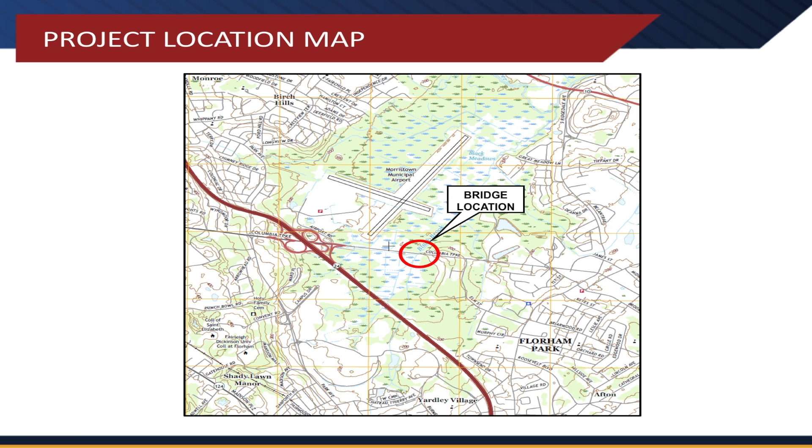So here's the location map. Again, there are some boards around you to see where the project is at. You can see it's just to the west of the interchange with Route 24. You can see the Morristown Municipal Airport there in the northwest corner.

Here is an aerial map which is zoomed in a little closer, and you can see some of the facilities or features in the area. There's the open road Cadillac dealer to the northwest. We have the Mack-Cali Business Park down there to the southeast. Eli's is right there to the northwest. And of course the bridge carries traffic over the Black Brook.

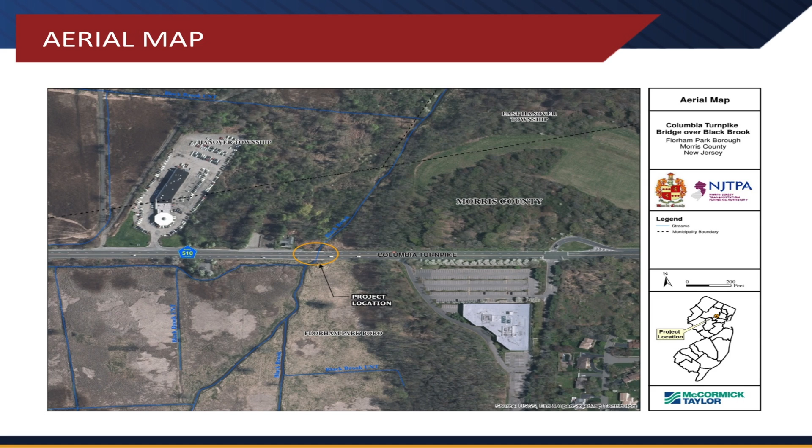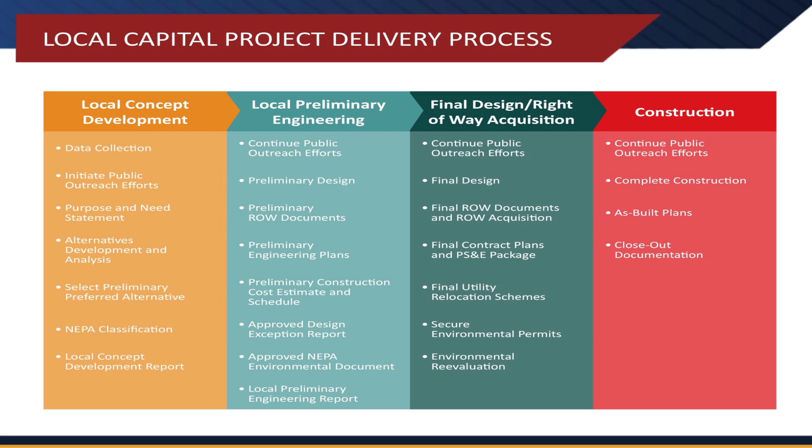So this is the local capital project delivery process. There are 4 phases here: the concept development phase, preliminary engineering phase, final design and right-of-way acquisition phase, and construction. We are in that first phase, local concept development. The first two times we were out to talk to you were to initiate the public outreach efforts, and then we came back out to discuss the alternatives we were developing. And now we're back out describing the preliminary preferred alternative. We're in this phase now, which is about an 18-month process. By the time we get to construction, these next two phases will probably be about 5 years, and then construction will probably be about 22 months, as Peter will talk about when he gets into the PPA.

Now, when we take a closer look at the local concept development process, again, this is what we're in now.

This is that first bar in the project delivery process. You can see that community outreach is a component of each of these phases or tasks along the way. So the first time we were out, we were talking about the existing conditions, we were developing the purpose and need, we were soliciting input from you, the locals here, as to what some of the other problems may be that we're unaware of. And we've done that, and we appreciate your input.

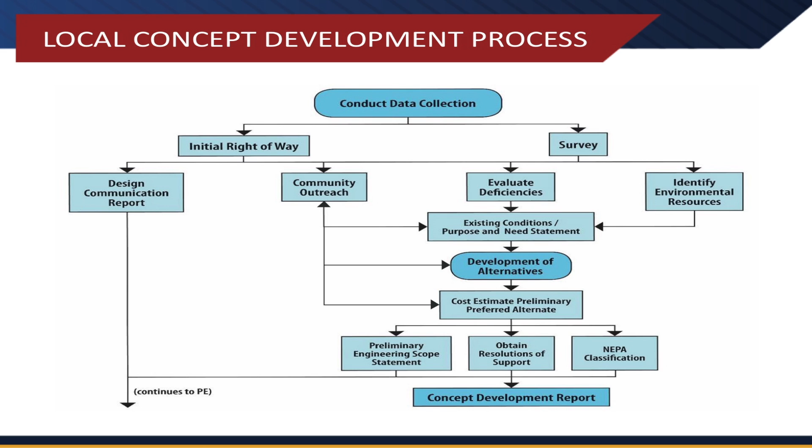Then we came out and we talked about the alternatives. We had developed several alternatives that we presented. We obtained input from the group. We took that input back, and then we refined it. And through additional coordination with the locals, the stakeholders, and the local officials, we've developed a preliminary preferred alternative, which we're here to talk about today.

So more about the bridge itself. Again, it was built in 1929. It was widened to the south in 1960. The bridge type is a single-span bridge. It has concrete encased steel beams and rolled steel multi-stringers. Its length is 35 feet. The width is 45 foot 7 inches.

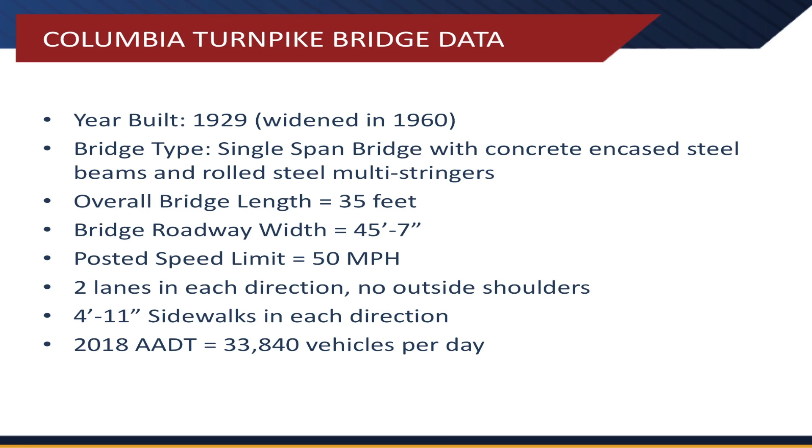The posted speed limit along Columbia Turnpike here is 50 miles an hour. It currently contains 2 lanes in each direction with no outside shoulders at the bridge. And there are sidewalks on the bridge which are 4 foot 11 inches in each direction. And the ADT is quite high here. This ADT was taken in 2018, and it's 33,840 vehicles per day. So lots of traffic there.

The condition of the bridge, overall it's in fair condition due to the condition of the superstructure. The superstructure is everything from the beams and up, and that's in fair condition with a rating of 5 out of 10. That's due to some section loss, which we'll show you some photos of. There's rusting at the beam ends, there's heavy rust, there's staining, spalls, laminations, the diaphragms with section losses and holes. And again, we have some pictures that we'll show you.

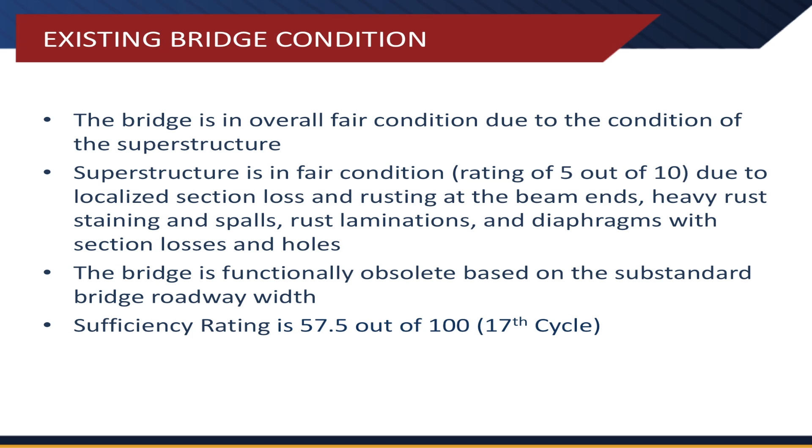There's also some photos on the opposite side of the room there. The bridge is considered to be functionally obsolete based on the substandard width, and that's specifically related to the shoulders, or lack thereof. And the sufficiency rating is a 57.5 out of 100 based on the 17th cycle. That's a bridge reevaluation report, which is conducted every 2 years.

So some of those photos that I was talking about. This one here shows the underdeck on the original section. This was the piece that was built in 1920. And you can see efflorescence, this is that white stuff there. That's where when the water infiltrates, it dries out and evaporates and leaves that alkali type material there.

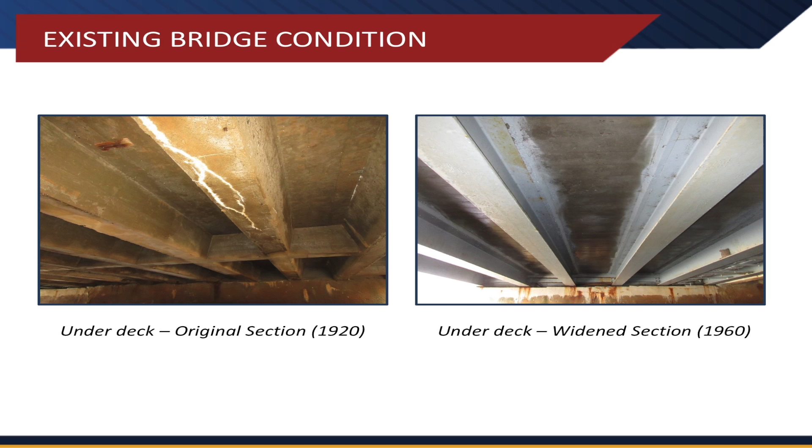This is the newer section, built in 1960. You can see this is an I-beam here. Again, you can see the corrosion down here, you can see the rust happening at the abutment there. Again, you see some rusting, some cracks in the abutment area here, efflorescence. So you can see that's in poor condition there. And here in this photo, you can see some spalling happening at the east abutment.

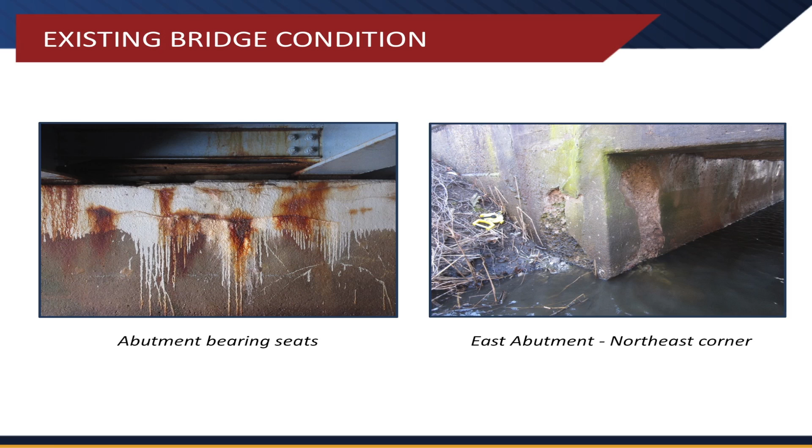So in addition to those issues on the bridge itself, there's also some environmental and site constraints that we need to take into consideration when we're looking at this bridge. We do have some features that are right in close proximity of the bridge, including Ely's, which I don't have my pointer for, but I think everybody in the room knows where Ely's is. It's right in this location here. All of this green in the area represents wetland areas, so that's a sensitive area that we try to avoid, minimize if not avoid at all lengths.

There is a property right here which is listed on the National Register of Historic Places. The structure's been removed, but the property itself, the land itself, is still considered historic. There's a pump station just opposite the Cadillac dealership, and then you have the Cadillac dealership itself, as well as an office building. So we do have quite a few things out here. I know the area seems rural, but right in the immediate vicinity of the bridge, there are some features that we need to consider when developing alternatives. We want to make sure we avoid, minimize impacts to all those things.

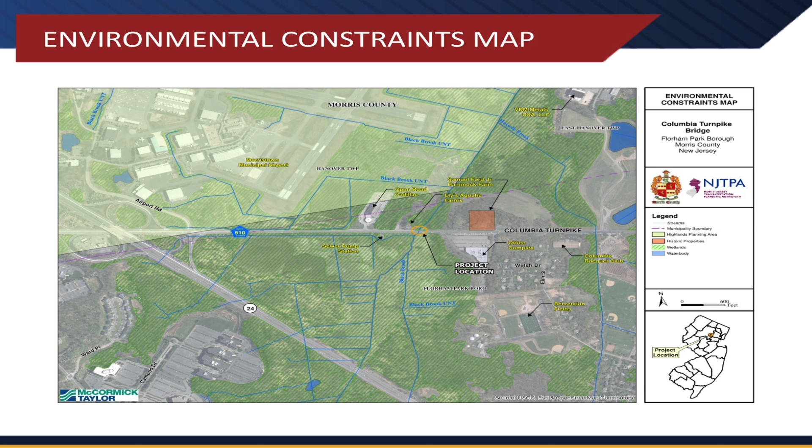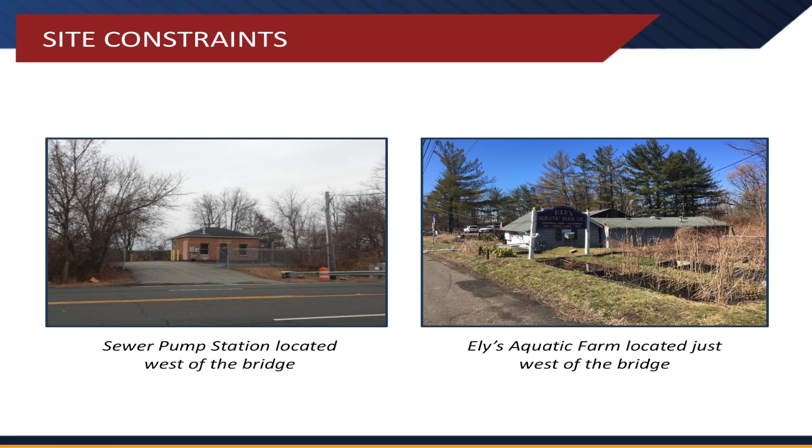And here are some of those features that I just described. Here's the sewer pump station, this is on the southwest side of the bridge. This is Ely's Aquatic Fish Farm, located right next to the bridge on the northwest side. This is the office complex, Matt Cali, on the northeast side of the bridge. And then the Morristown Municipal Airport, which is located on the northwest side.

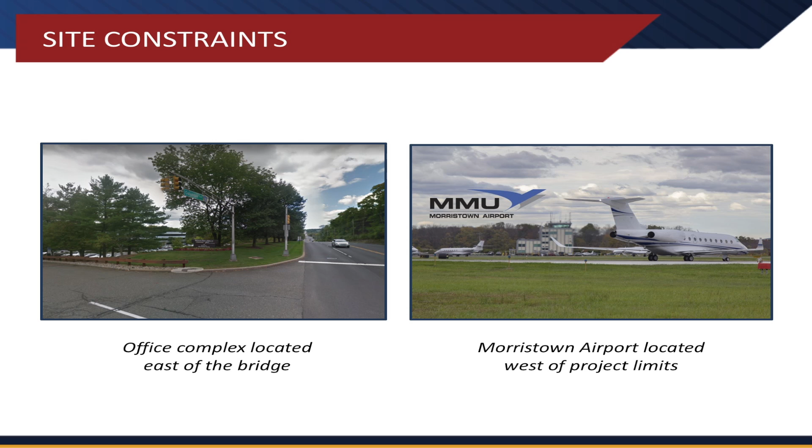In terms of the status of the project, in November 2017 is when we started the LCP study. In the spring, we completed the data collection and held our first local officials briefing, as well as the Public Information Center. Then in June, we developed the project purpose and need statement. In the summer, we developed the conceptual alternatives. In August, we came back for local officials briefing number 2, and in September we had our stakeholders meeting and Public Information Center number 2. Here we are on the 12th of December to talk about the preliminary preferred alternative through the local officials briefing and the Public Information Center.

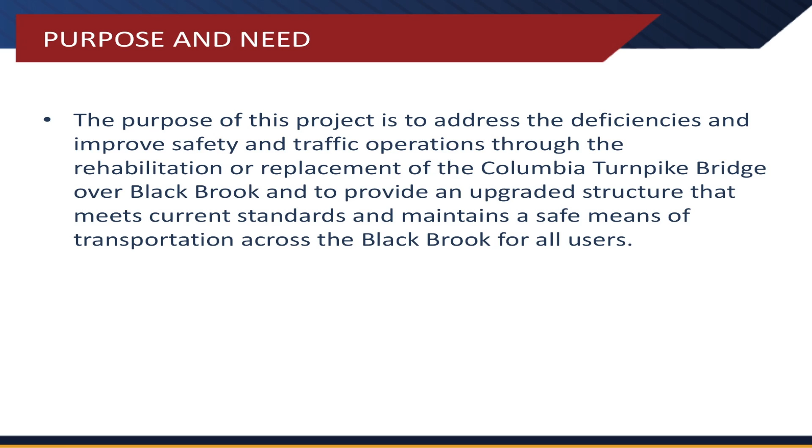So the purpose and need for this project is stated here. Again, this came from input from the various stakeholders and locals that we spoke to through these meetings, as well as our own research from reports and field and site evaluations.

The bridge is currently functionally obsolete due to the substandard roadway shoulder widths, and it's in overall fair condition due to the condition rating of the superstructure. The superstructure condition is fair with a rating of 5 out of 10, and the substructure is in satisfactory condition. The bridge currently has a sufficiency rating of 57.5.

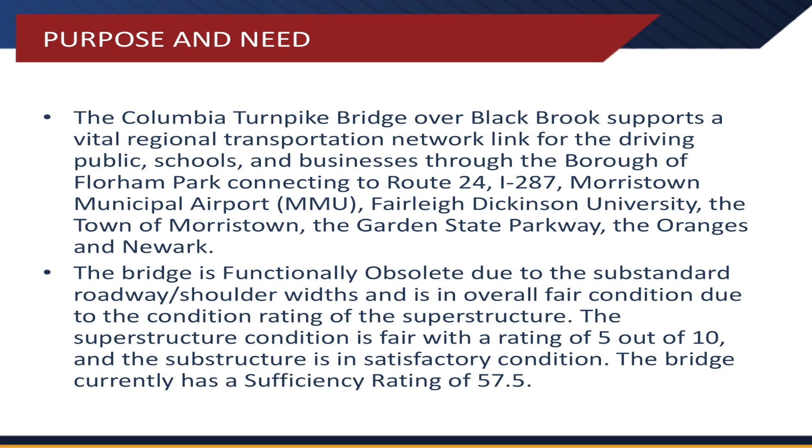So that's the need. Now we also have some goals and objectives that we'd like these alternatives, and specifically the PPA, preliminary preferred alternative, to meet as many of as possible. We'd address bridge structural deficiencies. We'd like to upgrade the bridge and approach roadway conditions to meet AASHTO and NJDOT safety standards, including new parapets and guide rail. We'd like to minimize the environmental, social, and economic impacts in the project area.

We want to minimize the impacts to the Black Brook. We want to minimize impacts to the existing utilities, including water, gas, electric, telephone, and fiber optic lines, all of which we have in the area there.

We want to minimize disruptions to traffic operations during construction. We want to maintain access to the adjacent businesses at all times during construction. We want to minimize the use of detours. If detours are required, utilize the state and county roadway networks to the greatest extent feasible. And we also want to provide bicycle and pedestrian compatibility to the approach roadways.

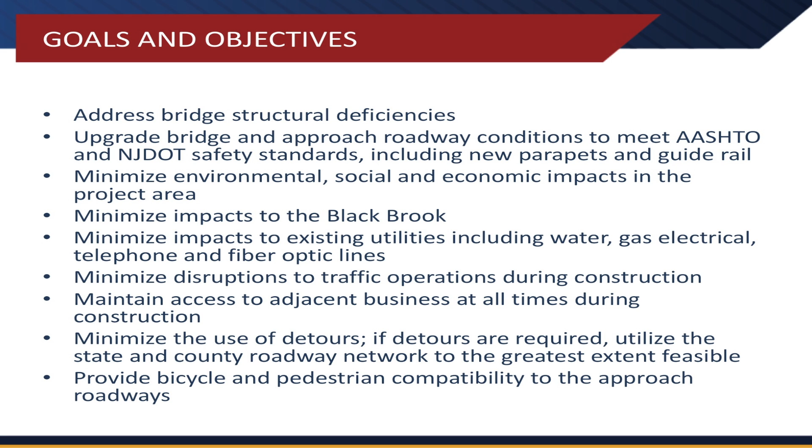So those are the goals and objectives. Like I said, we try to meet as many of these as we can. Often we cannot, but it's certainly our goal, and the ones that pan out to be the PPA usually succeed in meeting most of these.

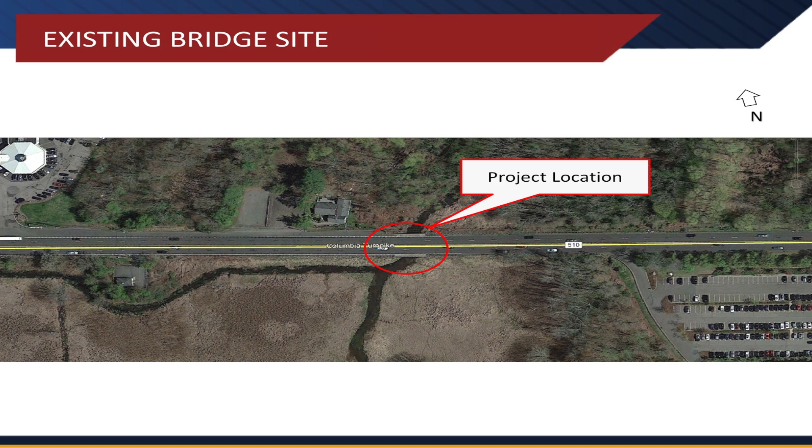So again, this is the existing bridge site, zoomed in a little bit more. Here's Eli's, just to get your bearings here. So some of the critical design parameters that we were looking at for the alternatives are given here.

The structure life, the life cycle - certainly we want a strong, durable, cost-effective bridge that has minimal maintenance cost and duration. We don't want to be out there all the time, and we don't want it to cost a lot to maintain this bridge.

In terms of hydrology and hydraulics, we can't have floodwater increases of greater than 0.04, which is a half an inch, upstream or downstream. We can't increase that floodwater elevation, and that's all impacted by how wide or narrow you make the bridge opening. So that's something we have to keep a close eye on as we look at our alternatives. As you'll see, we have a skew on our PPA because we had to tie into the brook, and it's just the right angle there.

For staging, we want to maintain the current traffic capacity on the Columbia Turnpike, and we have to do that by keeping all 4 lanes open. I mentioned that the ADT was 39,000 vehicles per day, and when we looked at that through traffic modeling, reducing it to 3 lanes or 2 lanes caused tremendous spillbacks. Those of you familiar with the area know that when flooding occurs up toward the Route 24 area, going to one lane in each direction really causes jams and extensive queuing, so we need to avoid that.

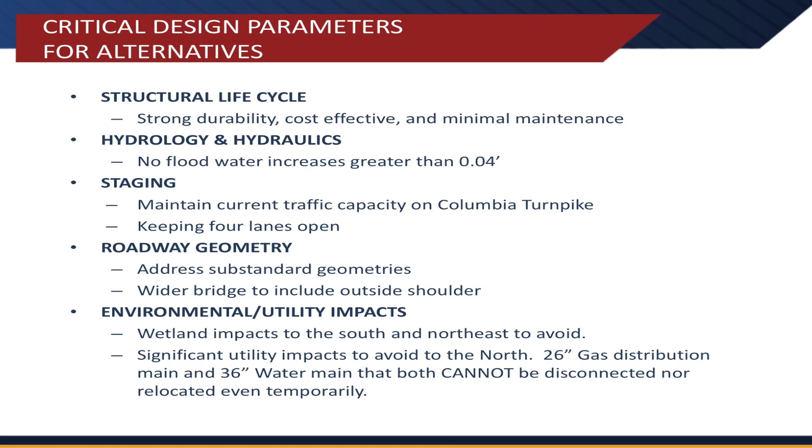So with that, I'd like to turn it over to Peter, who's going to talk about the alternatives as well as the PPA.

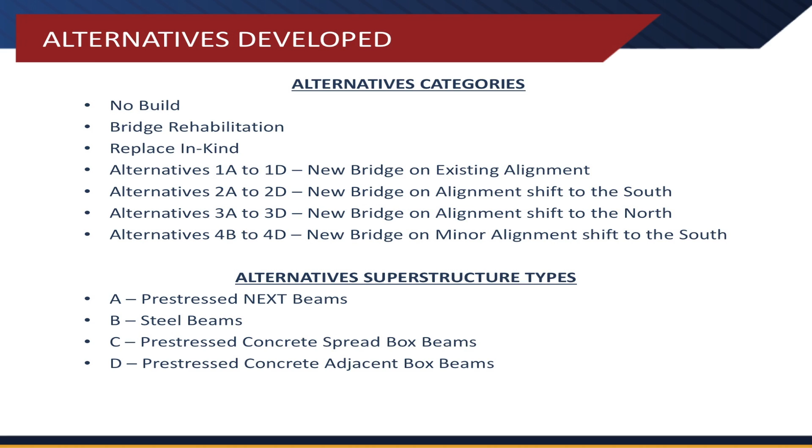Within those alternatives, there were design factors and implications with correlations causing other impacts. With stage construction, more stages means a longer project duration and additional constructability challenges. With fewer stages, there's more durability, less cost, and less maintenance.

With the roadway alignment shifts we were proposing, the greater the alignment shift in either direction equals fewer stages, but the project limits get longer on the roadway, as you can see in some of the roadway plans here. That would also equal more environmental, utility, and property impacts.

Sorry—with less alignment shift, there would be more stages, shorter project limits, and less environmental, utility, and property impacts. With greater alignment shift, there would be more environmental, utility, and property impacts. With the greater alignment shift to the south, there was an even greater impact into the wetlands, which would require additional retaining walls with impacts into the wetlands.

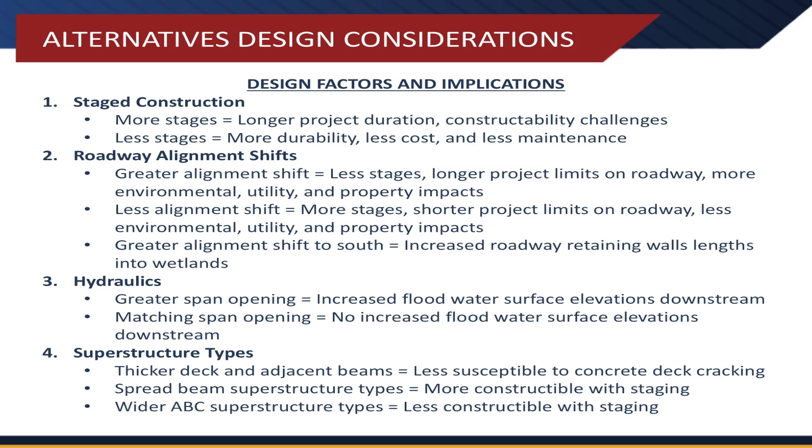So we went through all the alternatives and came up with this matrix here and all the factors, and it basically came down to Alternative 4D. You can see the matrix here if you want a closer look at all the factors involved.

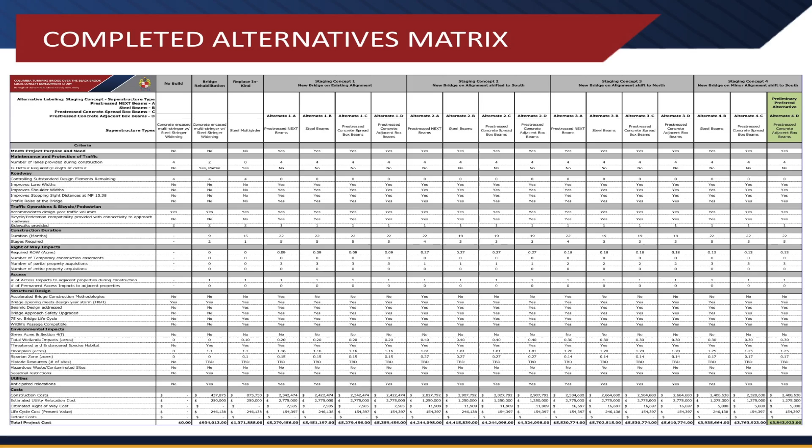So for 4D as the preferred alternative selection summary: this alternative best addressed everything. It maintains 4 lanes during construction, avoids a detour, removes the substandard design elements, provides a 75-year structural life cycle that is cost effective, and provides lower maintenance over the life of the bridge. It has a minor alignment shift to the south, creating comparatively shorter project limits on the roadway.

It minimizes impacts to the wetlands, avoids significant utility impacts to the gas main and water main to the north, and minimizes property impacts. The superstructure beam types are the adjacent box beams, with a thicker deck providing less susceptibility to concrete deck cracking, which strongly contributes to long-term durability.

There is an additional cost for that structural upgrade, but comparatively in the overall project, it's less than 2.5% of the overall project cost. This alternative best addresses the hydraulic challenges and avoids stream impacts and relocations. We provided a 12.5-degree skew at the inlet for the whole bridge to avoid any relocation of the channel at the inlet.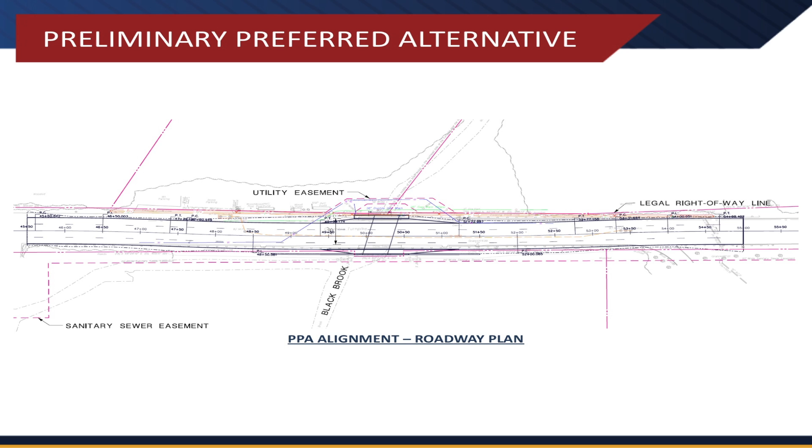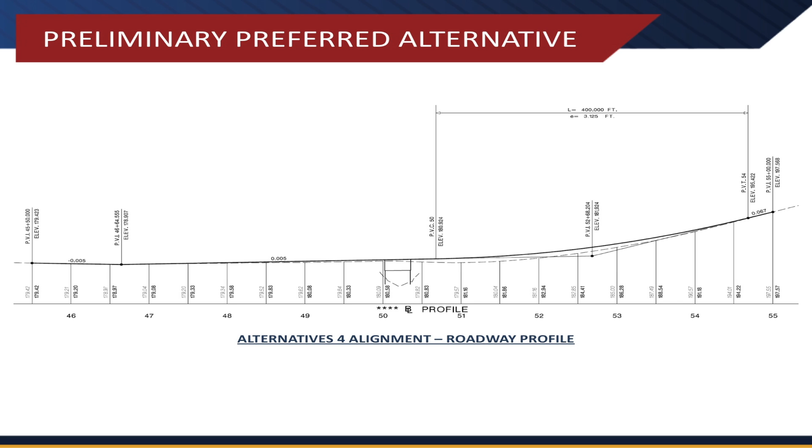This is the PPA roadway profile. We're raising up the profile on the eastern side slightly, just to smooth it out there and take away that substandard element. We can kind of go through the staging.

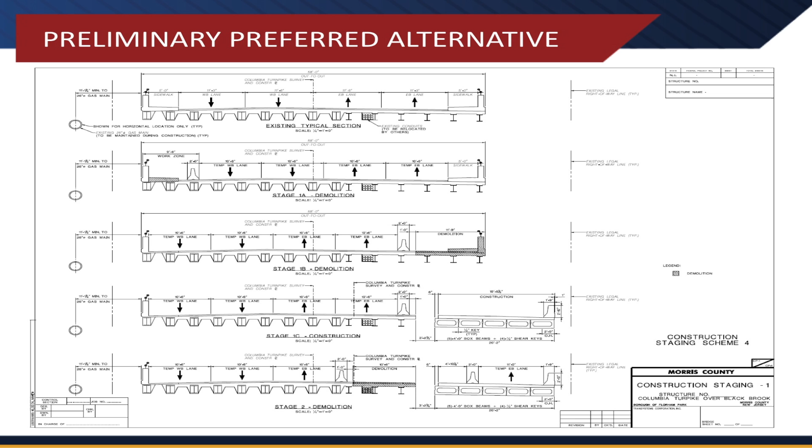Basically what the staging is, it provides a way to maintain the 4 lanes at all times. You can see as we progress across, we run into the utilities in the center there, and we have to provide a utility bay for them to continue on with their utility connection there. And from there we continue across until we get to the final condition where we have the 4 12-foot lanes, the sidewalk, and the 2 8-foot shoulders.

This slide here shows a really critical utility. This is the 26-inch gas main, and it isn't shown vertically to scale, but it is horizontally. So this is what we were working with on that north side. We needed to stay away from that at a distance that is constructible for the contractor to get in there and provide the sheeting. So this was really our constraint on the north side.

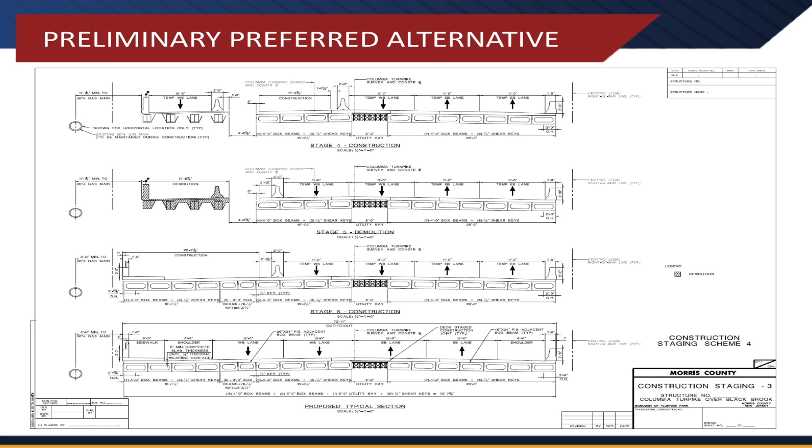As we mentioned before, this is something that we were told by the utility provider that couldn't be relocated, temporarily shut down, or bypassed, so that was a major, major constraint.

So in terms of the project schedule, as I mentioned, we are in the local concept development. The entire schedule length is 18 months, which will take us to June of 2019. That's when we'll be wrapping up this phase, and then the project will enter the preliminary engineering phase.

But some of the major milestones: the purpose and needs statement we completed in June of 2018. We developed the conceptual alternatives in August. We selected the PPA this month, in December. We're going to submit the draft LCD report in March of 2019, and then we plan to complete this phase in June of 2019.

When we were looking to get input on the conceptual alternatives, we were out here with the local officials on August 30th, and then we were talking with the stakeholders on September 11th, and we came out for the Public Information Center the same day, actually the same room. Those two meetings went back to back, as they are tonight.